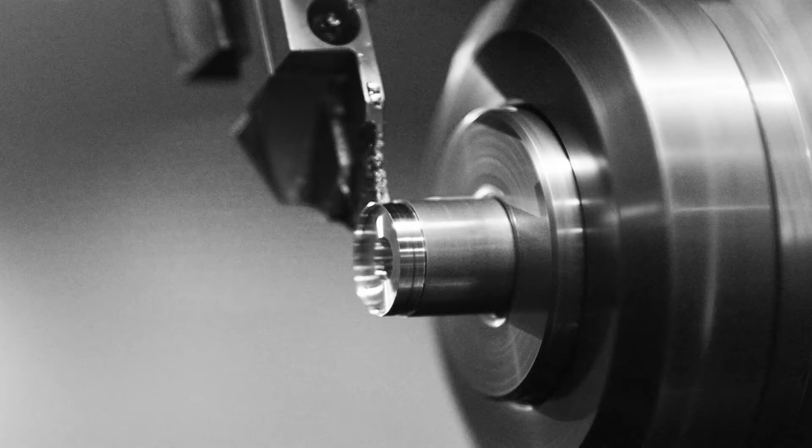So what are process templates within Tebis? You don't know? Well, I'm pleased to say we're joined by Tebis today, and Andy is going to talk us through it. What is a process template, Andy? So, hi Joe. Process templates in Tebis are a way of predefining a series of machining operations.

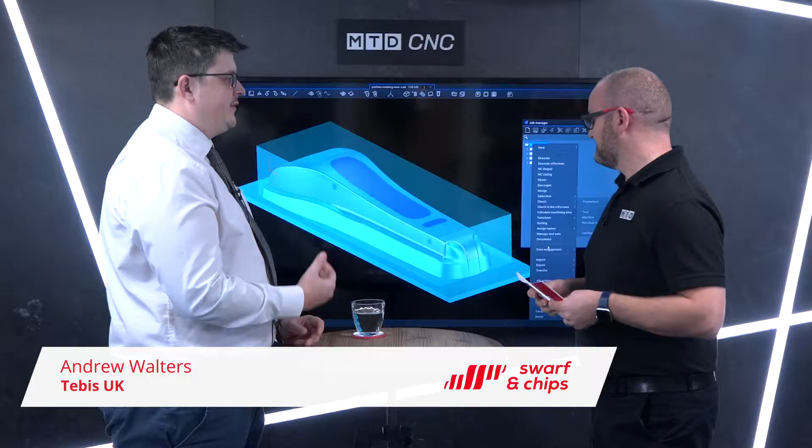In the example on the screen, what we've done is we're going to import the template, and then we're going to have 7 or so machining operations appear. These 7 machining operations are a predetermined machining process for machining this particular type of mould tool. So how's it getting that data? How's it generating? How does it know it's a template, basically?

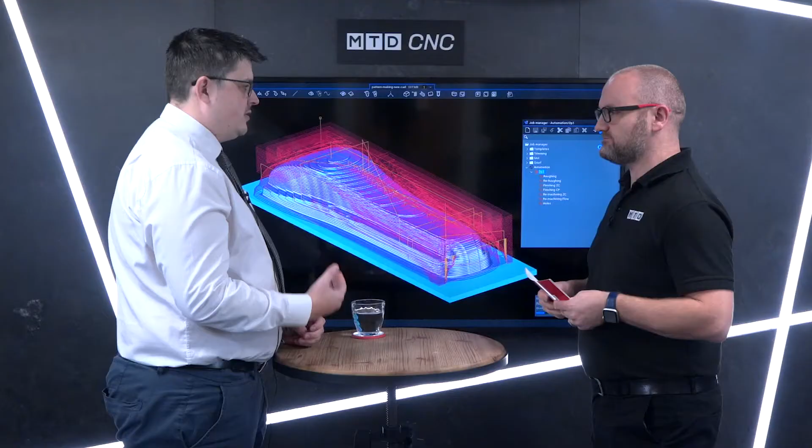So basically the template comes in as a complete program. In Tebis, you can either then choose the individual information that you need for Tebis to machine, so choose your drive surfaces and stock and stuff like that. In this actual example, what we've done is we've automated the entire process, and the operations are able to pick out the information that they need from within the layer tree within the CAD.

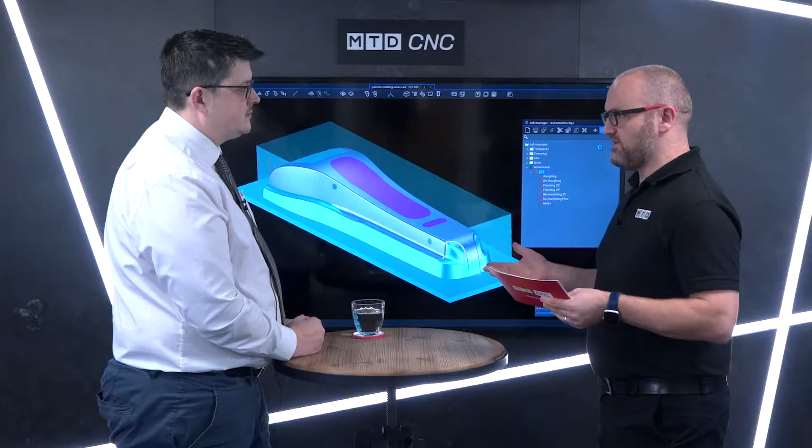So in the roughing operation, it chooses all the drive surfaces. It also chooses the starting stock material and is able to program the tool process completely automated. Including the NC code? Absolutely. So once we've done this template and calculated it all the way through, we can then use our virtual machine. We can then output the code, and we've got a program ready to go.

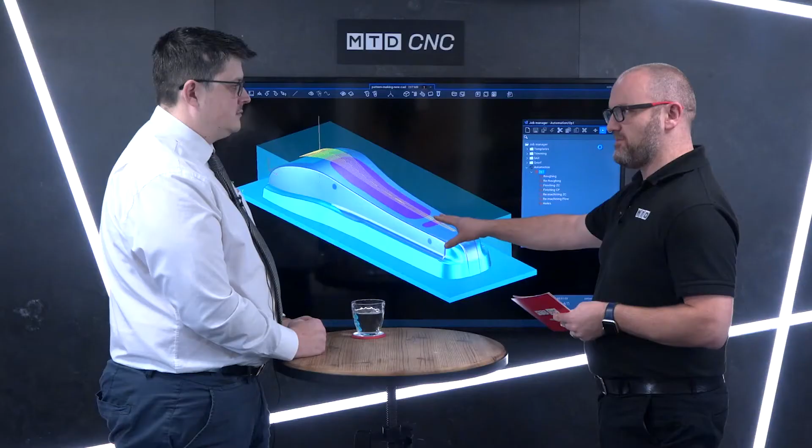Okay, so people at home, they're going to be watching us talk, hearing automatic programming. They're probably thinking, how complicated is it? This looks dead simple on a computer monitor, but in reality, how straightforward is it to get to this stage? It really is this simple to get through to this stage. Generally what we have in companies will be a high-level user. They're able to define these templates themselves. They can design the process that is needed to suit the jobs that they're creating.

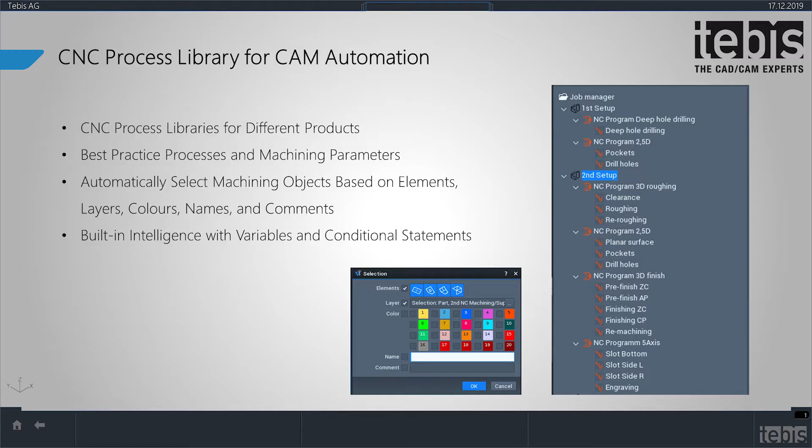Okay, and talk to me about the advantages. The big one is obviously time, but are there any others? Yeah, so time is the obvious advantage, but also because we're using predefined processes, they're set up by an engineer within the company. It means that every time you produce a part, we wind up with the same surface finishes, the same sort of tolerances. Everyone's working to the same sort of standards.

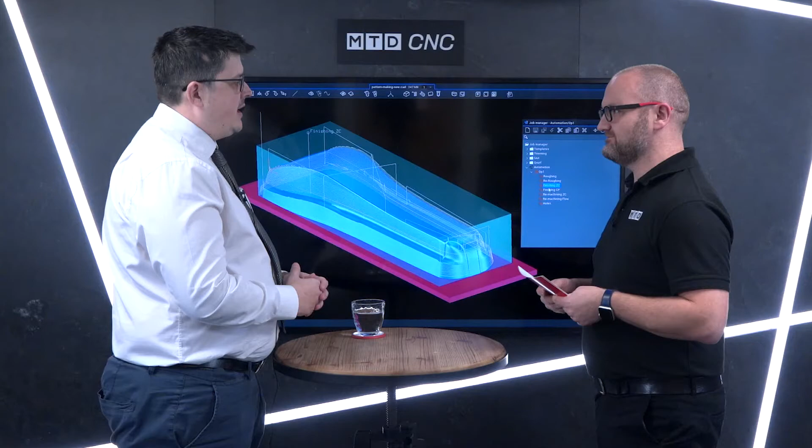What it also means is that any processes are held within Tebis. That means if you do lose a guy, or if you have a new guy coming in, that information and that knowledge is held within the company. It means that losing a guy doesn't lose you your process. And again, when you couple this with your NC programming automation, and even the tooling library, you can ensure parts are going to be the same. Just because you've got two 60mm face mills, a different face mill will give you a different surface finish.

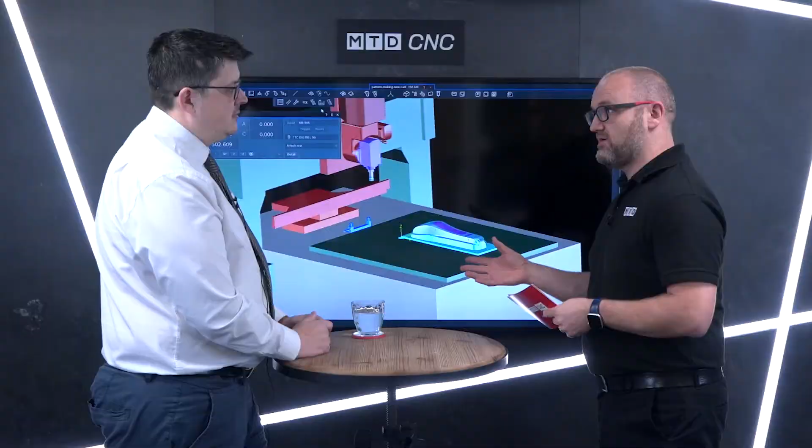Absolutely. So Tebis knows it's got to be tool A rather than tool B. Yes, without a doubt. Because of the advanced automation and the way that the tool libraries work, we're able to cross-reference between materials and different machines. That's also applied within the template. The template is also able to incorporate our feature recognition technology, and then also apply NC sets, which are another level of automation when predefining machining processes.

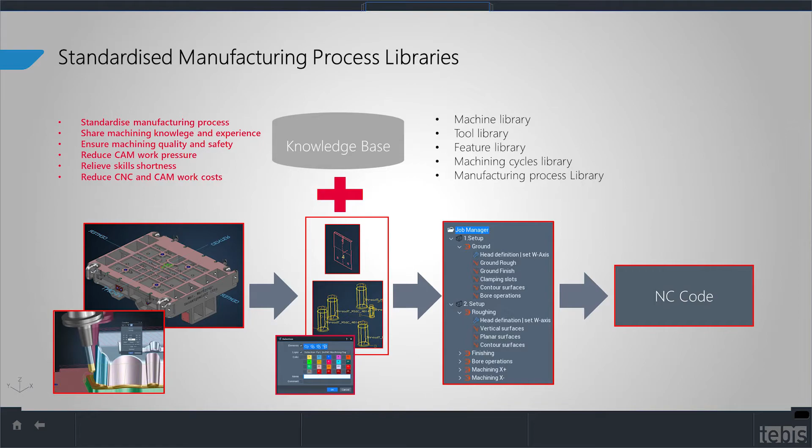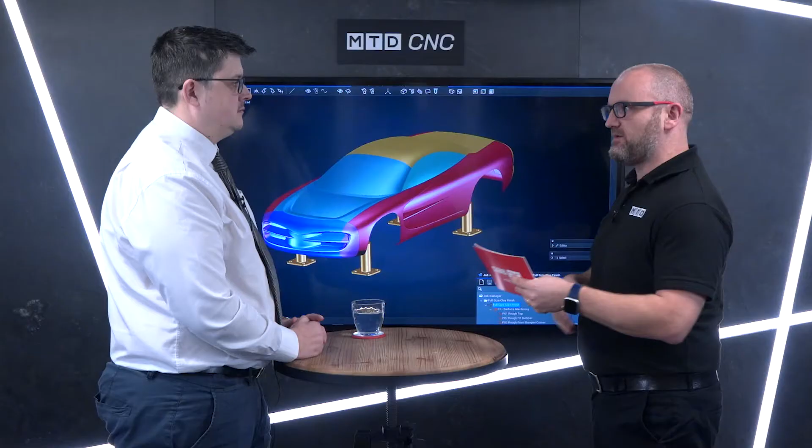And because you simulate the machines essentially, don't you? You know what it says on your computer screen is essentially what's going to be output onto the machine and ultimately the finished component. Absolutely. All of our automation technology working hand in hand with our virtual machine means that we should get a good program right first time. I can see this will be quite straightforward for 2D, 3D objects, but how about simultaneous 5-axis machining? Is it still achievable?

Absolutely. Tebis is able to automatically create 5-axis toolpaths within these templates. In the first model that we saw, we had a 3 to 5-axis converter, and that is literally creating a 3-axis toolpath, converting it to 5-axis, just to create tool holder clearance on the tool as it's machining down steep sides.

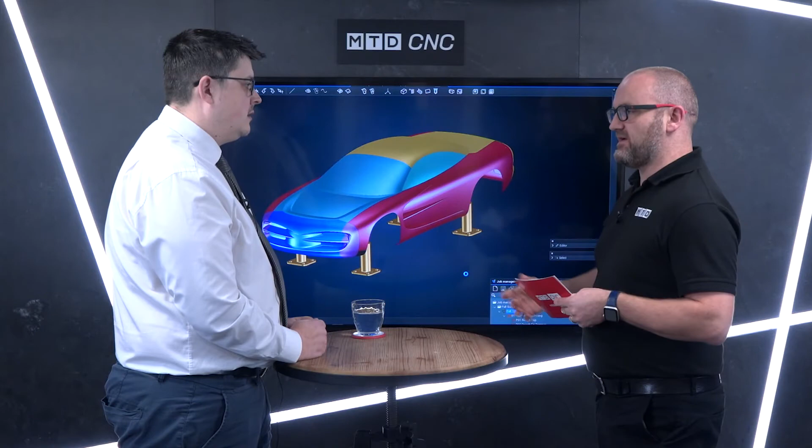In this particular example on the screen, Tebis is also able to determine that it's a 3+2 operation that's needed, and changes the tilt angle of the head and creates the correct approach positions and directions for the tool. And that's defined by Tebis. We're not selecting the surface and doing it ourselves. No, again, fully automated. This particular part, the different machining areas are separated onto individual layers. They're also color coded, and the template is set up so that it knows exactly which angle and which direction to attack each of these surfaces.